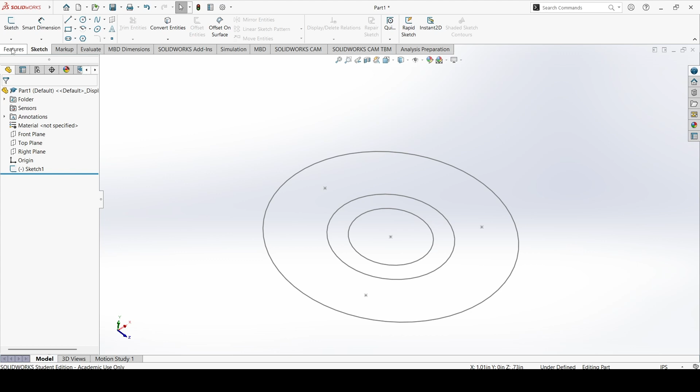Now, we need to review basic features. So after you have constructed a sketch similar to this one, or whatever your part sketch looks like, you need to go to the Features tab. So before we begin, if you look on the left side, there's a Sketch option here. Whenever we start to add features, the rest of the features will be added under this. So just keep that in mind.

Now, there's a few different options. There isn't many initially, but the features include an extruded boss/base, a revolved boss/base, and then swept, lofted, and boundary. Really, we're only going to review extruded for right now, but revolve does the same thing, except it revolves it kind of around an axis.

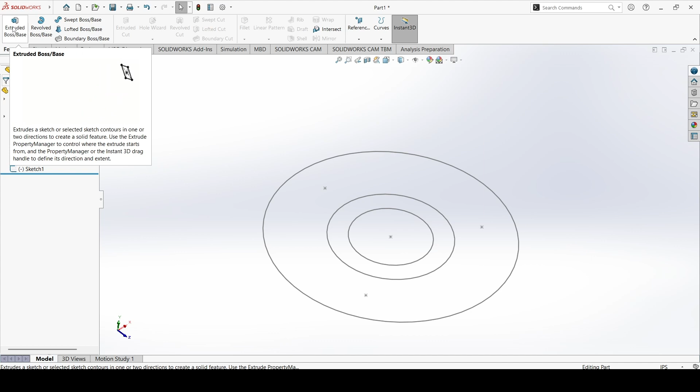So if we just select extruded base, you can select a few different things. So you can select a line, and see if we select this, and we rotate around it a little bit, it makes thick the entire sketch, and we don't want that in this case. This is going to be a little sprocket piece, and what the sprocket piece does is it holds a gear or a sprocket with a chain onto a drive shaft.

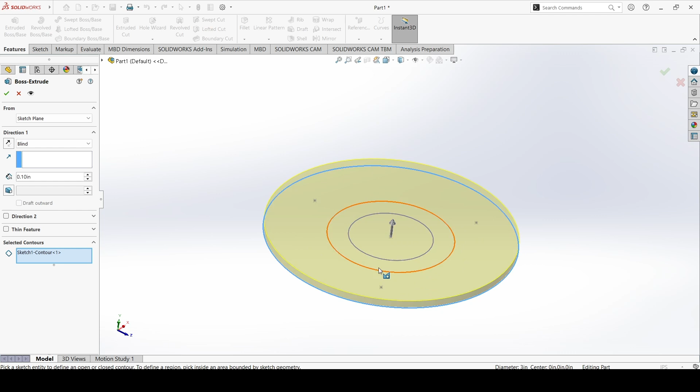So, selected contours. So what a contour is, it's just kind of like a surface. And see what we're doing here whenever we're selecting over this, see the red? That should negate it, or so it should ignore that. So now that we selected that, see now it has a hole in the middle. But this still isn't quite what I'm looking for right now, because I want to make this center area here longer to fit on the pipe shaft.

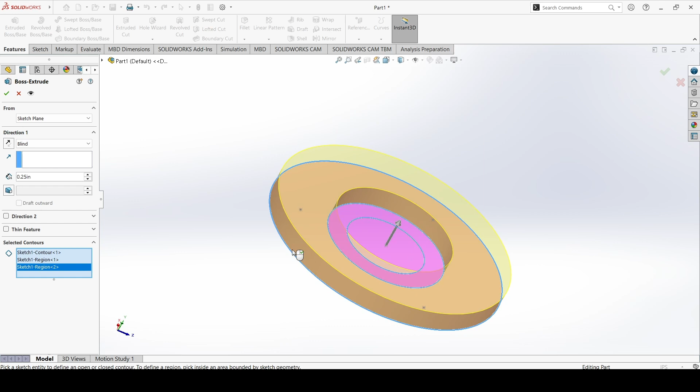So if I just select this other portion, it just makes this ring. And we're just going to make this 1/4 inch thick. This would probably be a lathe piece, but that's more manufacturing side. So now we have this. It says it's 1/4 inch thick, and we have this outline here in the center. So if we just hit the OK mark, we're left with this.

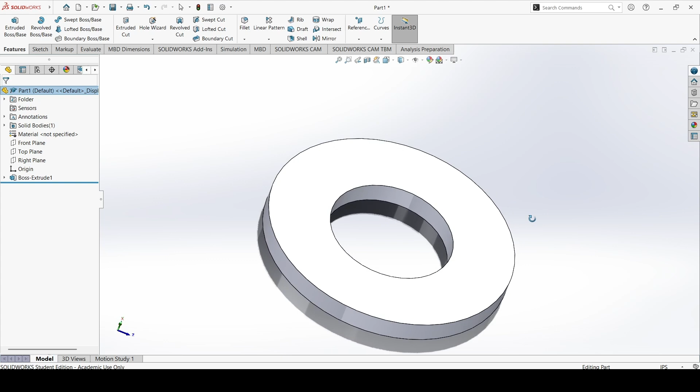So after we click off of it, the sketch disappears. The sketch disappears because it's under this feature here. And so this part isn't done yet. Right now it's just a washer. So what we can also do, we can go back into the sketch, right click it, and hit show. What that will do is it'll just show it in our viewport.

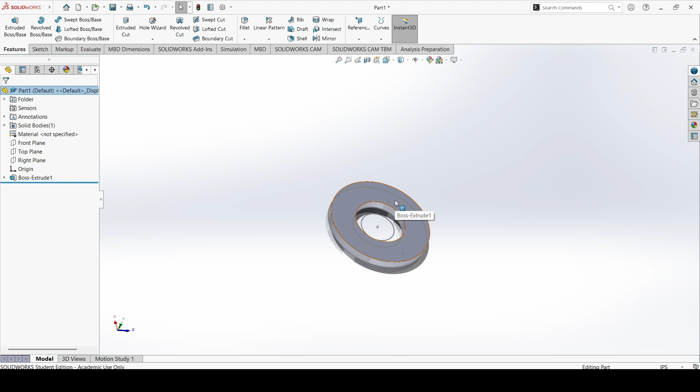So what we need to do now is create the little flange part that goes onto the pipe. So we need to go to extruded boss/base again, and this time select the outside one. And as you can see again, it highlights the entire section, and we don't want that. So if we just go back to contour, and you have to select over here on the contours,

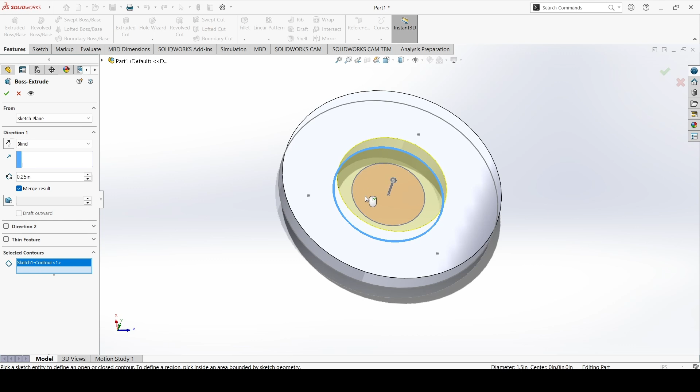hit the red part that we want to not extrude out, and we can either change the dimension on the left side here, or we can just drag our little thing. So let's just say we want it to be 2 inches. I couldn't get it quite right over there, so we just do 2 inches. All right.

So there's a few different settings in this section. On the left side here, there's blind, through all, up to vertex, up to surface, offset, up to body, midplane, stuff like that. So usually you do use blind, but in the case where you don't know a dimension, you might want to do up to surface. And see, in this case, there's no surfaces out here, so it doesn't really know what to do. But over here on the left side, it's selected.

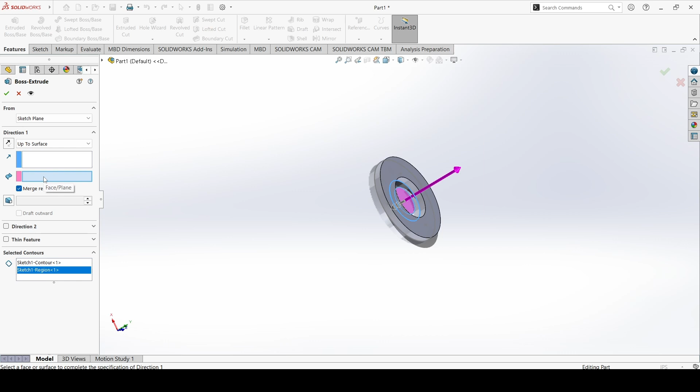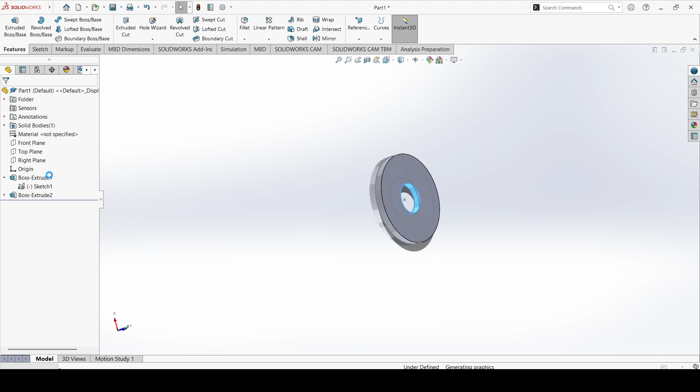It allows you to select a surface later. So if say the surface was this top piece, it would automatically do that. But in this case, we don't want that. And we'll go over this in one of the next few tutorials. But if you right click, you can edit the feature again to change the settings. And so since we did not want the surface, we can select other ones.

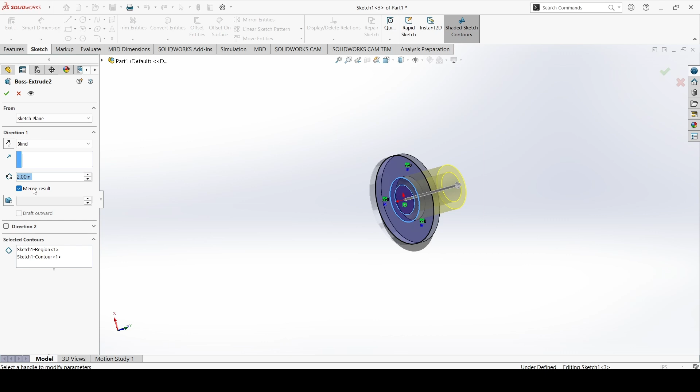So usually blind is what you want to use, 2 inches, and then merge result. This is important. Sometimes you want pieces to be all one piece. So if I merge this result, this is one full piece. I'm going to hide the sketch here, but this is one full piece. So whenever you export a file, it's going to be one full piece.

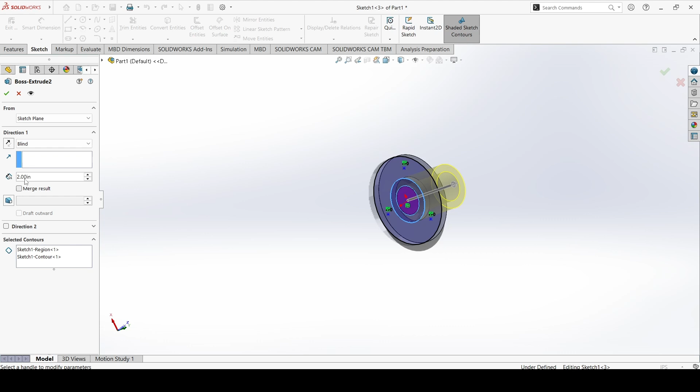However, if I go back, edit, and then if I say it does not want to be merged with what's already there, well, now it's sort of two pieces. And so you can move this, you should be able to.

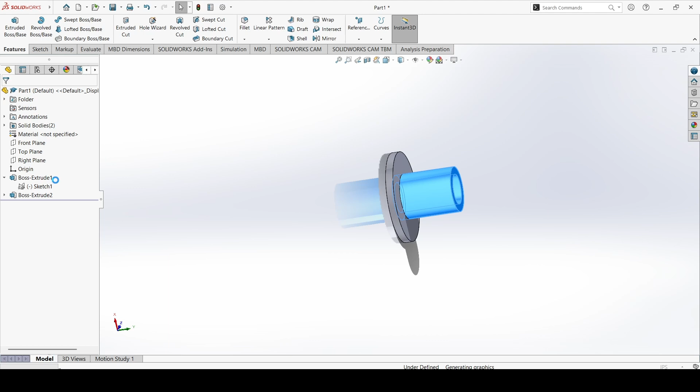Yeah, you can move it, but usually you don't want to. So right now what we've done is we've created this little flange here, and we're going to remerge it because that's what we want, because it's one solid piece and it's easier for programs later on to read. Merge result. Now we have one solid piece.

Now, there's a few other options. Now that we have a solid body, there's a few other options we have access to. Extruded cut, hole wizard, revolved cut, other types of cuts, a fillet, and chamfer, a few different pattern types, ribs, drafts, and other stuff like that. And mirror, which we'll go over later.

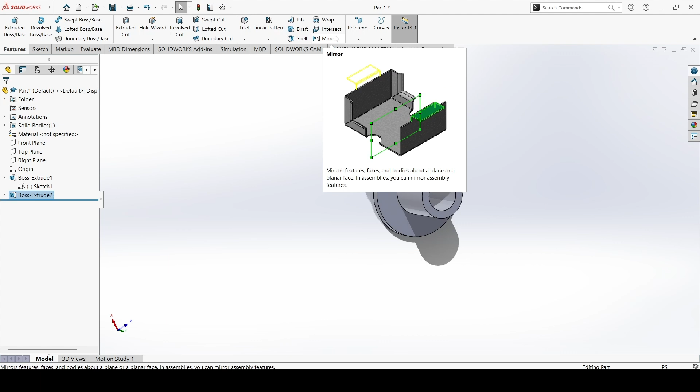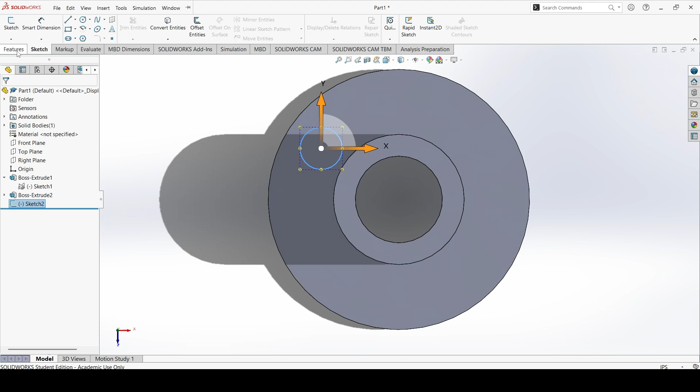Extruded cut: if we have another sketch, I'll make one real quick, say here, and we just draw a little circle here. I won't dimension this thing for the sake of time. But if we go here, we can go extruded cut, select this surface, and it will cut through a body that we have. So here's another pretty good time to show you the other settings on cut.

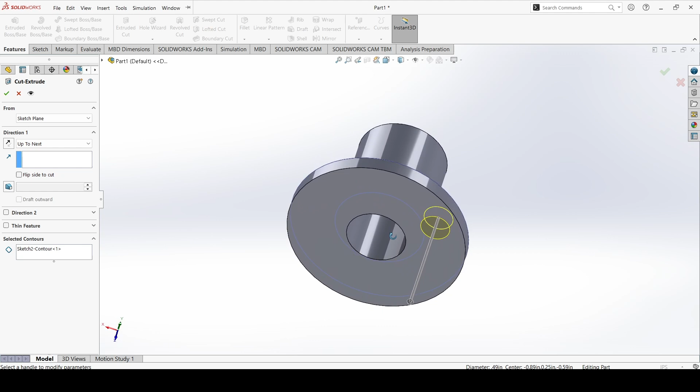So when we're cutting, obviously it's going from the sketch we made through the part and just deleting it, removing material from it. So blind is just a distance. This is often done with holes, but we'll get to that in just a few seconds. But you can also do up to next. And up to next is up to the next surface of your part. So as you can see, where the yellow is, that's where it's going to stop cutting, just like that. So there's a hole just like that.

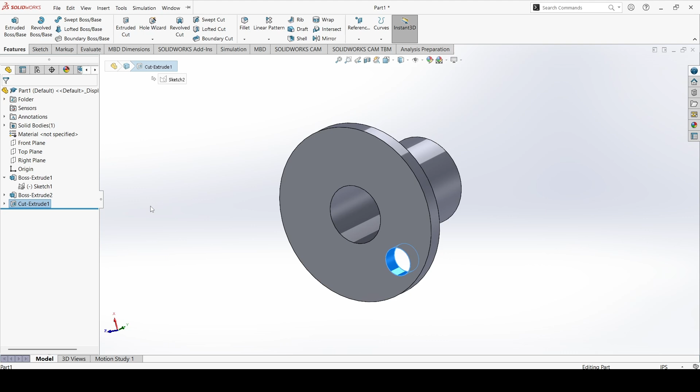I'll delete it here in a second, but that's what the cut does. You'll probably also use that a lot. It's one of the main tools in SolidWorks. So when you delete, it asks if you want to delete the entire thing. Usually this isn't that big of a deal, so you just hit yes. It won't delete the sketch, so we'll delete the sketch too, and we'll go from there.

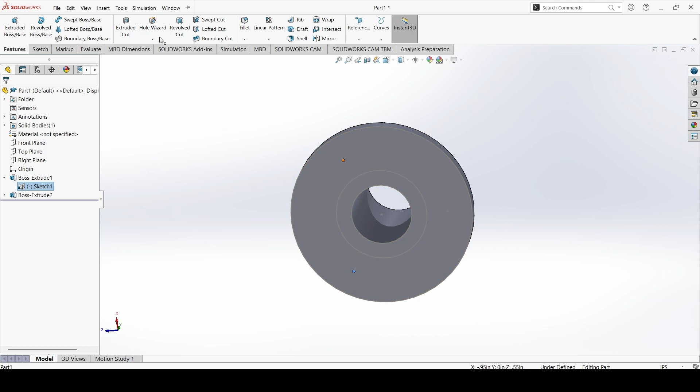And right now I want to show the original sketch again, because if you look closely, there's these points here that I made for a reason. That reason is so I can use the hole wizard. This piece would usually have holes in it, and I'm going to add holes in just a second. If we go here, we go to hole wizard.

There's a whole bunch of different settings, and you can get very specific with it because this is a great tool to use. But there's a few different hole types. There's counterbore, countersink, simple hole, or straight tap, and stuff like that. Tapered tap. There's a lot of different settings, and there's legacy hole. I believe that's more of a custom, and then there's counterbore slots, countersink slots, and just regular slots.

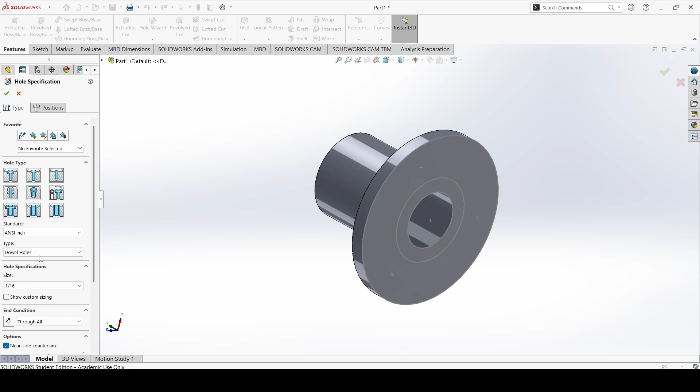So let's say this time I just want a simple hole, a straight through hole. There's a whole bunch of different standards. Usually ANSI is what you use. All drill sizes generally works in machine shops. Sometimes you'll use dowels, and so there's dowel sizes specifically. But in this case, we'll just use all drill sizes. And so what I want to do is take a 1/4 inch, no, let's go 3/8 of an inch hole through each of these parts.

There's a whole bunch of different number sizes, but every so often there's actual fractional sizes, I guess you could say. So if we just keep scrolling, eventually you get up to like 5/64, and this here eventually is a 1/4. But like I said, I wanted 3/8, and you just keep scrolling. So 3/8 is somewhere around here, right here. Select 3/8.

And there's an end condition. Sometimes your part is thick enough that you don't want it to go all the way through, so you can select blind and set how long you want your hole to be. But in this case, we want through all. Usually these options here don't get changed because they're pretty standard. You can do different callout values, which is in machinist documentation. I usually just leave those the same.

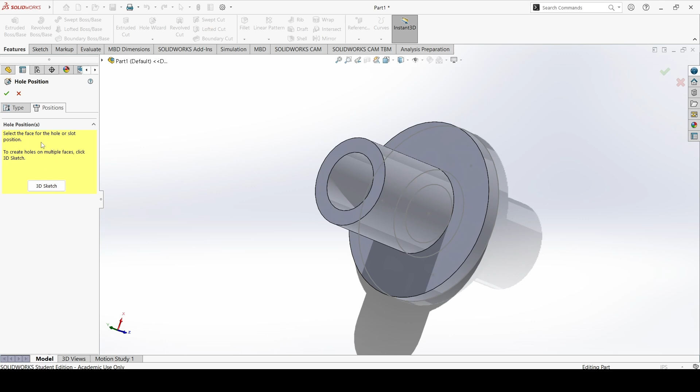And now we can go to positions up here. It's asking us to select the face, hole, or slot position. So we should be able to select this face. As you can see, we selected the back face, or the face that our sketch was made on. And our holes can be lined up exactly with these points that I put on the surface. That's why points are very useful in sketches.

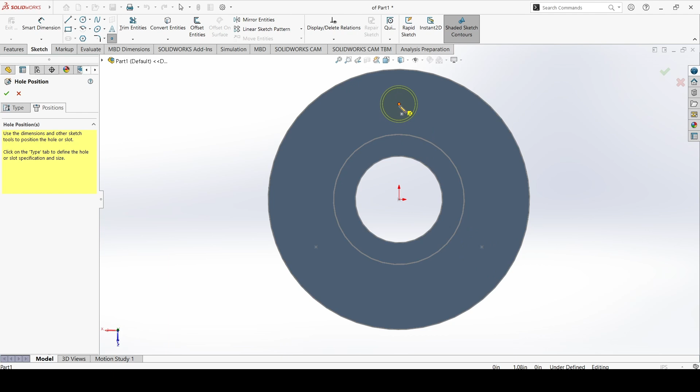A lot of people ignore them, and they will add these holes just willy-nilly and then dimension them after. It's a lot easier to add points to your sketch initially, and then whenever you're doing this, add the holes in later.

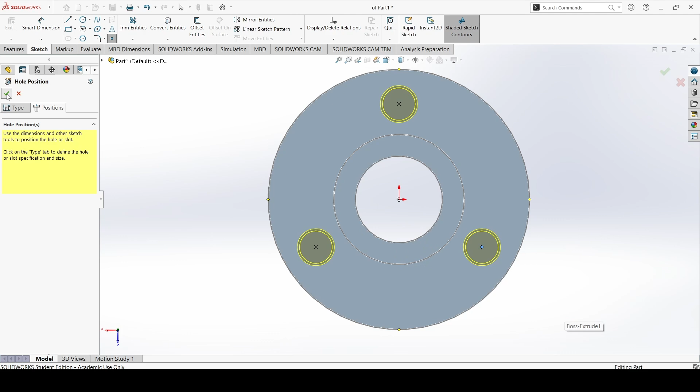So as you can see, we are fully defined down here in the bottom right, which means the second we hit this check mark, everything's going to be fine. So in this case, we have just made a flange, a sprocket flange. So the pipe would go in here, holes would be there, holes would be bolted through, and it would spin.

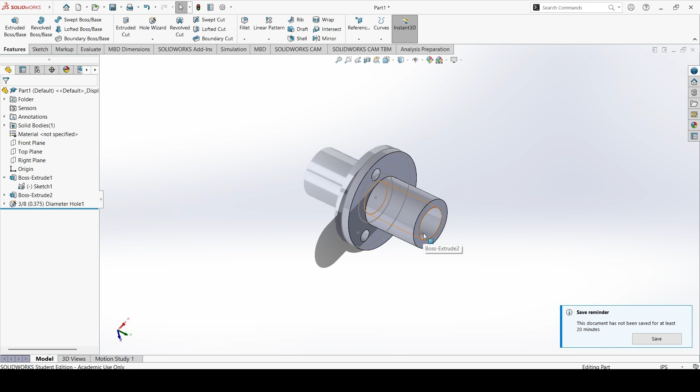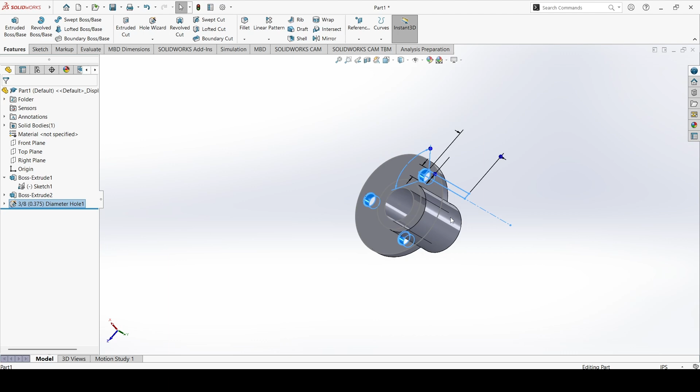Obviously, there's going to be a hole coming down here, and I will show you how to do that in just a second. But ignore these little tolerance bits to initially get the screw in or bolt in. Those don't matter too much. The person who's machining the part, especially if it's you, knows that sometimes that's there and sometimes it's not. So now we're going to make the hole through the center there.

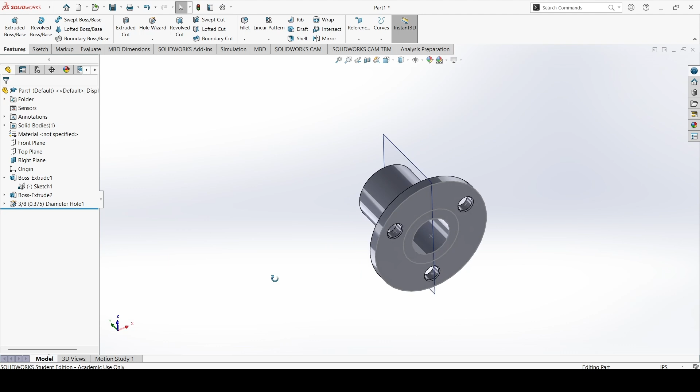All right. So, really quick, this is easiest when you have your planes like this right plane showing. So as you can see, the middle of our part is through this. I've rotated around this part many times, and it doesn't really matter which way you do it. I'm going to put a hole straight down through this extrusion shaft. So we're going to do that by going back to the hole wizard.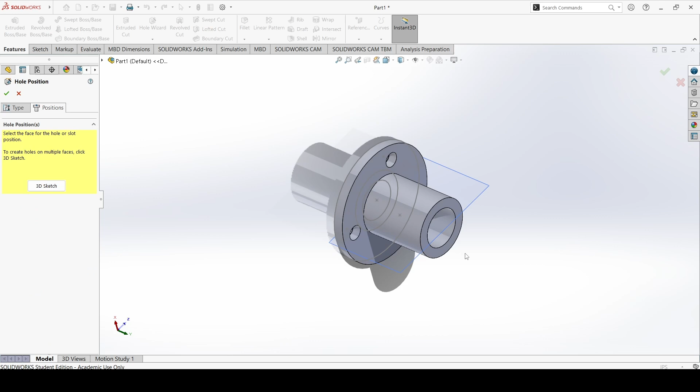Regular drill. This time I want to go a little bit less of a size, say 1/4 inch. It doesn't really matter too much, but when you're actually making a part, it does. It says through all, and we're going to select positions. And so we can select this face. And as you can see, if you look very closely, it's rotating with whatever orientation on the cylinder we are.

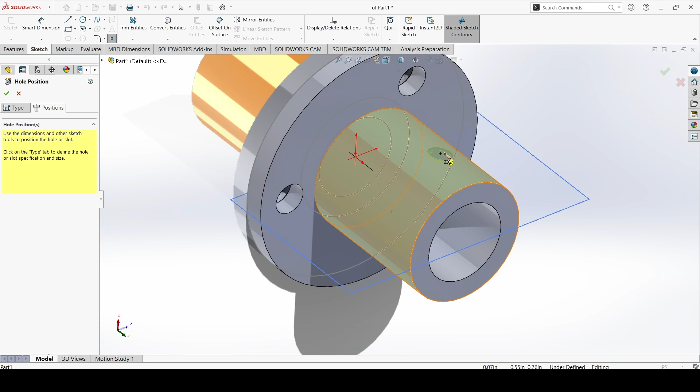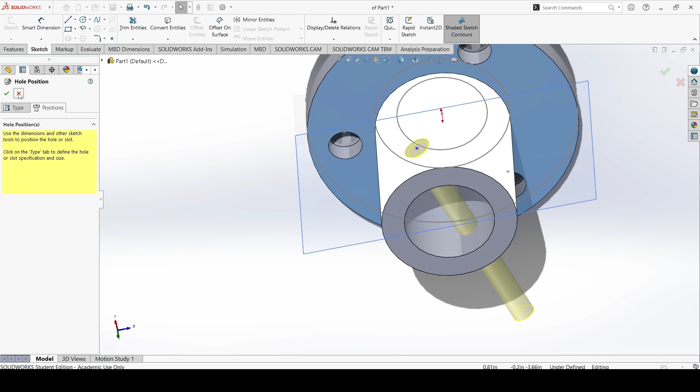So I can select here, and it puts a kind of cattywampus, if you will, hole in there. And while this is technically okay, it's not very optimal. It is difficult to do because it's hard to get it all centered on here. So I'm actually going to back out of this and instead create just a hole. I'm going to create a sketch on this plane. Going to just make a circle.

Boom. So 0.25. And whenever you enter it down here in the bottom left on parameters, sometimes it doesn't make it official, if that makes sense. You have to go back with Smart Dimension and actually input it. 0.25. All right. So now that's there. Technically it is in the center, but if I'm not careful, I'm able to move this around because it's underdefined in the bottom right. So we're going to add relation.

We're going to select that point and the origin point. We're going to make them vertical. Hit the check mark. So now it should only be able to move up and down. So now we need to smart dimension. Select that point and this point again. And unlike the last video, for some reason, it's not popping up with the actual dimensions. But I'm just going to make it 1.25 inches from the edge.

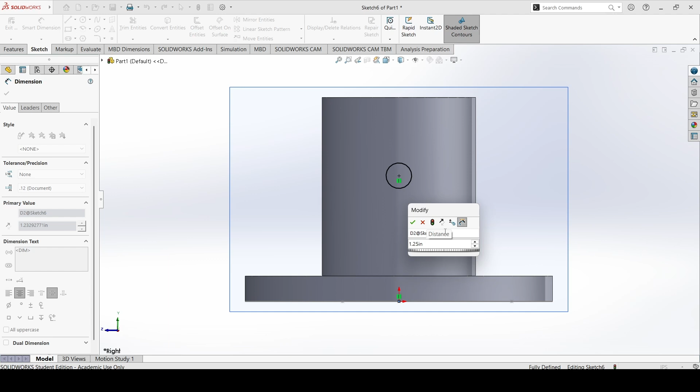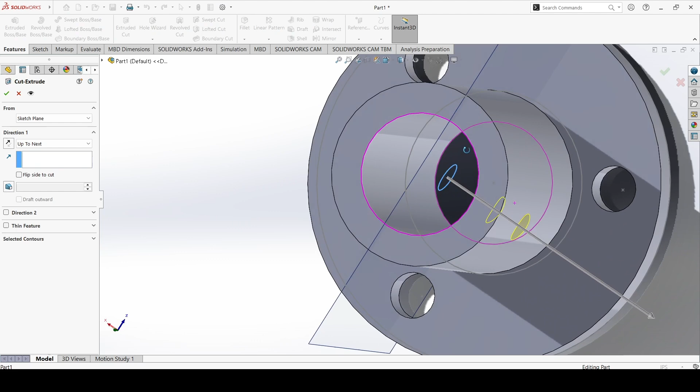Okay. Just like that, we have a sketch. We have to exit sketch too. We have a little circle and the middle plane of our sprocket. So what we're going to do is go back to features, extruded cut, and it automatically puts it one way. What if you want it to go both? So on the left side, we have it up to next.

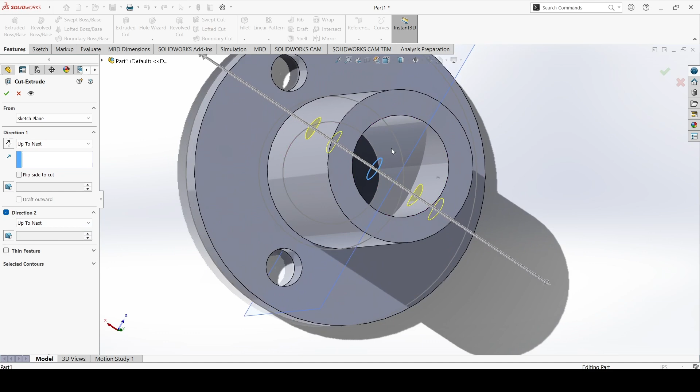Direction 1 is up to next. And you can also have a direction 2. So if we just select direction 2, it does the same thing. We can go up to next, and then it has a nice hole all the way through. So that concludes the basic features, such as the extrude and cut and hole wizard as well.

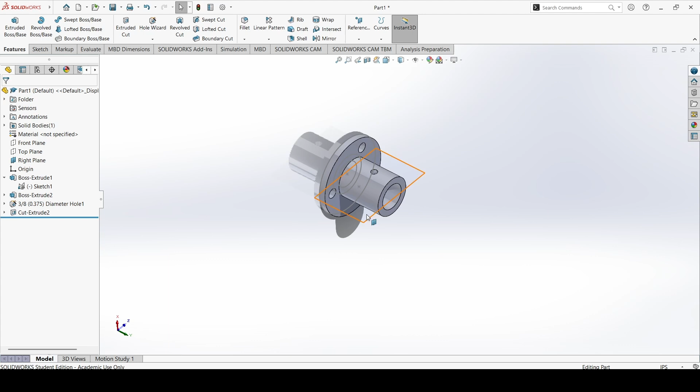Revolved, both the cut and the extrude features: essentially you could make this part with a cross section and then revolve it like that. But many times it's easier just to build it like this. A fillet, I'll show you how to do that real quick. You just select a face, and oftentimes the manufacturing team will have you do this because their tools can't make

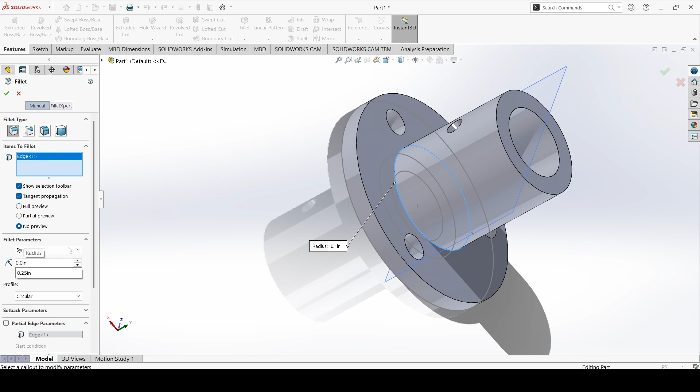sharp edges like this. And also, you do not want sharp edges like this due to stress concentrations, which make your part potentially fail. Makes it more likely for a brittle fracture to happen. So, as you can see, we can just hit the check mark, and it makes a fillet for us.

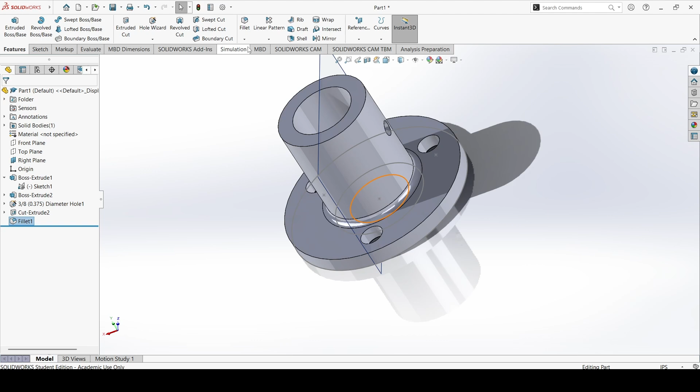So, like I said, we can go back and change that really quick. 0.1, check, and that looks a little better. So, that's how you use the fillet. The chamfer is very similar, except it's a flat edge, not a kind of curve.